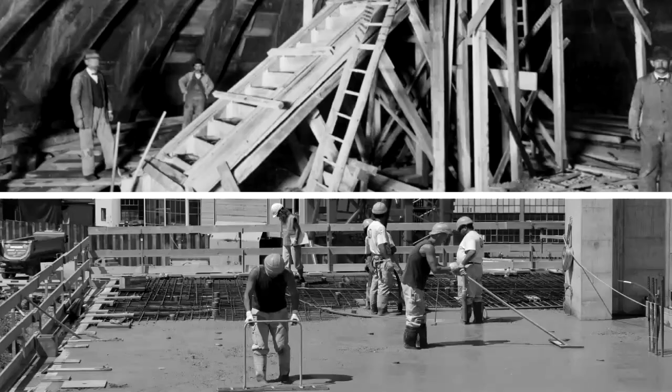I like to start here. Because you're not from Zurich, I might need to explain a little bit what you're looking at. On the top, you see the construction of the dome of ETH Zurich in concrete, and on the bottom, the construction of the only high-rise in Zurich, the Prime Tower. And being slightly cheeky, one could argue that the only thing that has changed in this almost 100 years is that people are wearing helmets.

So this is maybe a good starting point, because clearly the world around us is rapidly evolving. So why does our industry still design for constructions that are being built like this? I want to start there because this is an issue. It's an issue because we have estimations that in the next 30 years there will be at least 2.1 billion more people on this planet. And the way we are constructing in our outdated ways has a lot of impact indeed on our planet.

So what does this mean, providing infrastructure, dwelling, housing for these 2.1 billion more people that need to be on this same planet? Bill and Melinda Gates in their 2019 annual letter calculated this for us. It's basically building the equivalent of one New York City every month for the next 40 years. So just to give you a little bit of a picture of how much construction needs to happen in order to provide for all of these people.

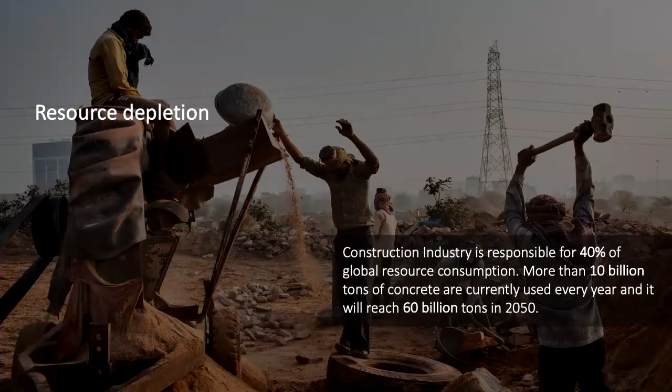On top of that, we are very irresponsibly indeed using natural resources, and the way we construct, we are depleting those. As an example, 80% of the world's urbanization of new building goes up in concrete. And one of the three ingredients of our favorite material to rapidly grow, sand, is estimated to no longer be available in the next 35 to 40 years, at least not in economically feasible ways.

So I hope that with these few statements, that I hope all of you actually are very aware of, you might agree that we need to change the way we design and build our structures indeed. We need many solutions, we need many strategies, we need a change yesterday. But what I will show is in our work, we introduce something that we call strength through geometry and material effectiveness, and I will explain what both terms mean, in order to provide really disruptive solutions. And we do this through state-of-the-art developments and opportunities in computational design and digital fabrication.

The reason I care about this as hybrid architect engineer, as structural designer, as I would call me, is because this is a very typical or an average picture which you see when you want to build a bit higher. So this is the typical weight distribution in a building for at least 10 stories and up. So what we're looking at is that 3/4 of the weight of the building is actually in its structure.

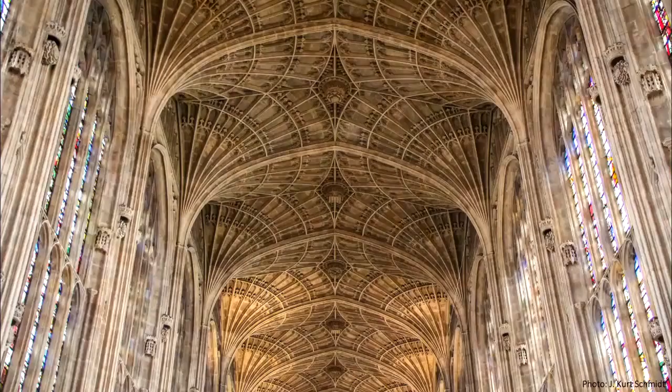First, strength through geometry. I did my PhD at MIT, and indeed in a very different field, as was introduced earlier. I developed a new method to understand and evaluate the stability and the safety of historic structures in unreinforced masonry. I like to start with these beautiful shells at Cambridge University. This is at King's College. This is a chapel of King's College.

You might not know that if you look at these shapes, they span 13 meters with a structural shell, an unreinforced stone shell, large pieces of stone that is only 10 centimeters. And if you calculate the ratio of the thickness over the span, if you were to cut an eggshell in half, that is literally the thickness of these structures.

So, starting my research and looking at these structures, I realized that they're extremely poorly understood, but also that modern designers and engineers would not dare to sign off on a structure like this. And it made me appreciate that perhaps there is something that we have lost in design and engineering indeed. We developed computational tools to actually rediscover these forms, tools that are white box, that actually expose the relation between form and force to the designer.

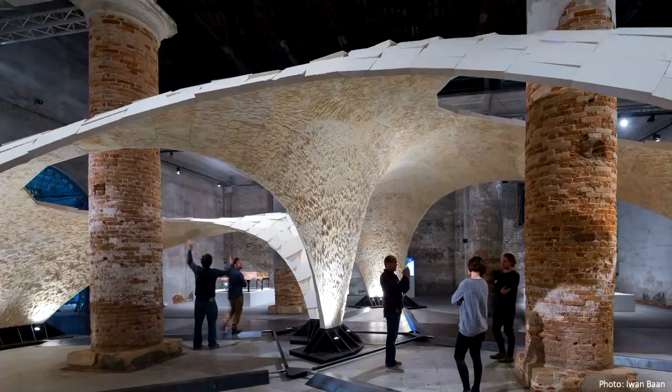But you can do anything you want in computational simulation. And that is why we took the 2016 Venice Biennale as an opportunity to make a statement. At that Biennale, we decided to make a 16-meter span unreinforced cut stone shell. So what you're looking at are 399 cut pieces of stone that are held together just by geometry. What you're looking at is in equilibrium, without even mortar, without glue, without reinforcement.

And so we did this extremely absurd kind of statement, because it is so different than anything else that we do nowadays, to really make sure that our colleagues were shaken up and understood that perhaps there are other ways to design. So here just also showing this thin sheet of stone that is kept in equilibrium. In this case, we are 1/3 of the thickness of an eggshell compared to the span proportionally.

Of course, these kind of projects cannot come together without designing for those. So we developed this entire pipeline to go all the way from a constrained form finding problem all the way to construction. By the way, for this we had only 5 months. 5 months for design, engineering, convincing the Italians that we were not absolutely crazy, fabrication and construction. I must admit that the third step was extremely challenging and they made us work for this process.

This actually was how we started, and this is also how we approached the project. But to be honest, as much as I will advocate that these kind of design challenges cannot be achieved without computation in every step from design, engineering, logistics, all the way to efficient fabrication, I also am a very strong believer that you need to think first, because if you put crap in the computer, then crap might indeed come out.

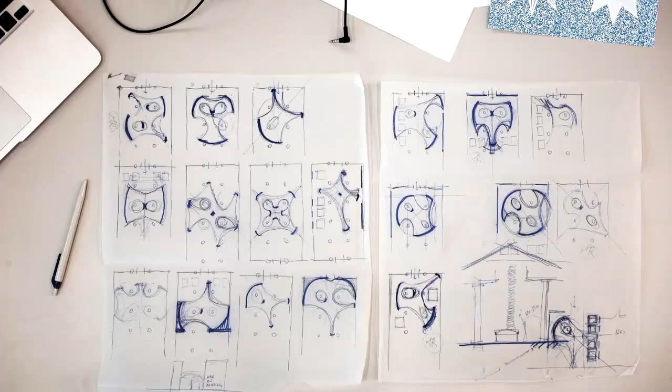And so these are the real sketches that we did in the beginning. These are my own sketches to try to understand the relation between the boundary conditions on the site and the geometries. And then we continue digitally. So this is actually digital sketching.

Because as I mentioned, these tools, which we share for free, this is RhinoVault, and RhinoVault 2 is coming out in less than a month, so an upgraded version for all the RhinoVault fans. No worries, it's coming. And so this allows you really to very explicitly start to sculpt and shape these kind of beautiful equilibrium forms.

This was an interesting moment when we were ready to start fabrication. Our contractor, our stone experts, the Escobedo Group in Austin, Texas, did a calculation, and this would have taken 2.5 years, not 1 month. And so then we realized that indeed we should take advantage of these more advanced cutting techniques, like for example these diamond encrusted wire saws. So it's basically a hot wire cutter for adults, and these multi-axis kind of blade cutters indeed.

So how did we achieve to go from 2.5 years to 1 month in fabrication? Here an overview of the steps. So a key thing is when you do 3D milling, complex kind of operations, never have to change or move the blank. Saves a lot of time. That is what you see on the left. Then we use these very efficient blades that really cut through this limestone like butter to make the interfaces.

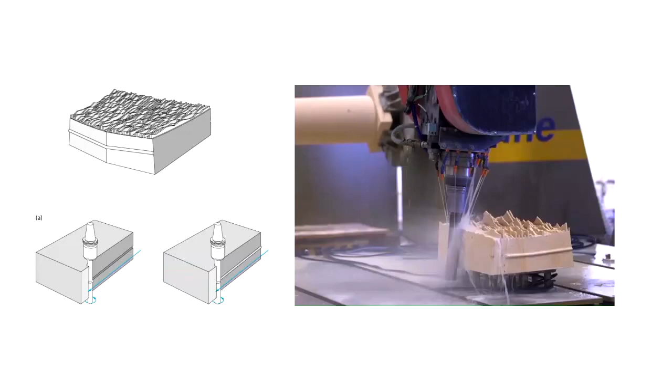And the doubly curved inside was approximated just with a few kind of rough cuts that were then hammered away by Hector. So one guy was in charge to hammer away all these little fins so that they would look a little bit similar. We did have to also custom design some profiling tools, and this opportunity we took to then include these little 6 millimeters reference elements.

The reason that we needed these profiling tools is because every stone had to be within 0.4 millimeters in global tolerances. Otherwise, this 3D puzzle would really not come together. But this actually helped us in engineering as well. So this was mainly a reference. Imagine that we are talking just about 5 centimeters. And so the masons had to place the stones exactly where they needed to be. We didn't have the references anymore. As you see, we had this rough cut for fabrication optimization on the inside.

But as I mentioned, for engineering, this was a key breakthrough moment. Because one thing that we try to also clarify in this process is that you could make a model of this complex geometry, and you could think that this is a perfect world situation. In reality, all these stones will have tolerances, not everything will touch perfectly. So what this mini reference mark gave us is actually, as a structural engineer, we could have the guarantee that stones would not have local sliding. And so that allowed us to really simplify the engineering approach and to focus on very intuitive methods indeed.

So here are some images of this stone vault being brought together. And maybe another thing to highlight is that we wanted to make this piece very educational, and all the cuts on the inside are actually aligned with the global force flow to make the visitor actually understand how this structure works indeed. You also see that it has this unique aesthetic that we of course celebrated, but the aesthetic is entirely driven by these fabrication measures, these optimization methods that we introduced earlier.

So this structure stood very happily for 5.5 months during the Venice Biennale, and is now unfortunately in boxes waiting for its final location, probably somewhere in Austin, Texas.

Obviously, we don't do these kind of crazy things without a lot of prototyping. This was one of our very early prototypes, models that we did in 2010. As you can see, this was quite an exciting day. We don't get to destroy our own structures typically.

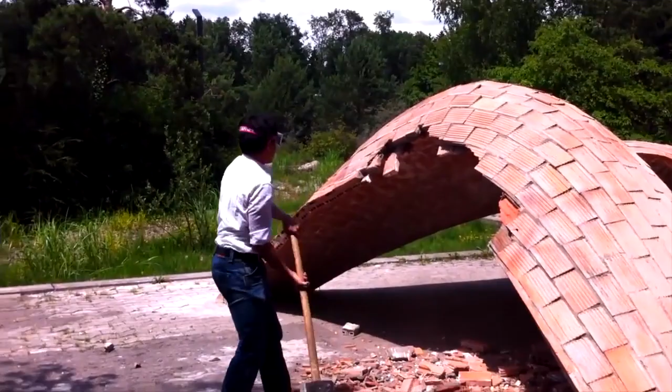A bit of making fun of my PhD students that clearly are not used to handle a hammer is appropriate, I think, but anyway.

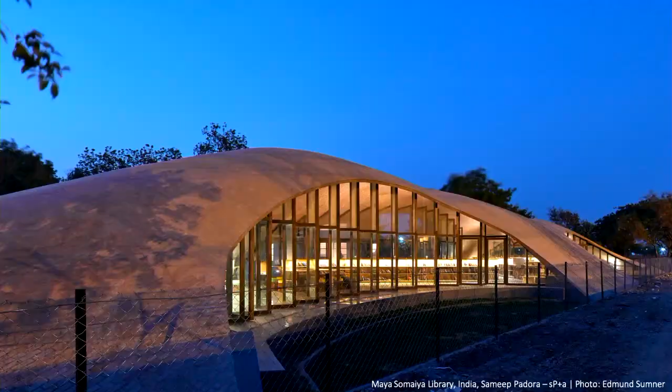So something that you see is the robustness, the resilience of these doubly curved geometries, that even if you take the supports away, they still stand. And so this is maybe an important message that indeed geometry is a key factor in the stability of systems, even entirely unreinforced.

I will now shift gears to quickly show a project that we had nothing to do with. This is a project by Sameep Padora in India, where they developed this exciting roof for a library of a local school with an extremely tight budget. But then suddenly I started to learn about this project, and in fact, in a very interesting way. Suddenly, we got full credit for the design of this project because Sameep and his team kind of argued in the description of the project that the design was thanks to and entirely because of RhinoVault.

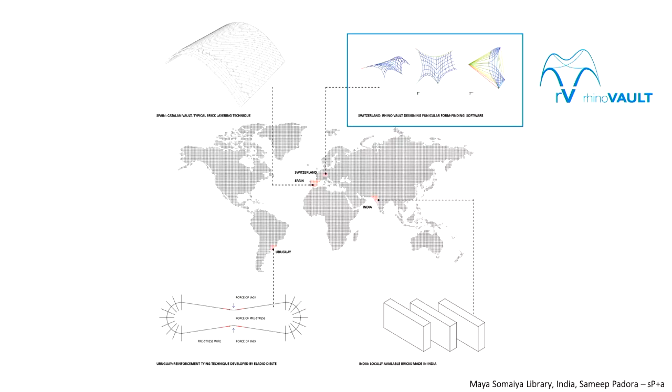And I just wanted to show this as a quick anecdote because many people have questioned us why we share everything we do, why we open source all our methods, why we develop tools for others to discover structural form and so on. And I think this is actually a nice message that 8 years after we did this sharing, we got credit for the design of probably the most beautiful project that was ever done with RhinoVault. There's many beautiful anecdotes about this project indeed.

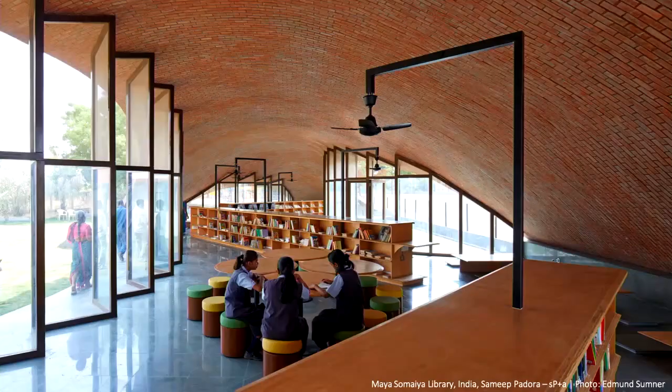All right, so strength through geometry was the first message. And there I wanted to say that you can do exceptional things with humble materials, unreinforced, by actually getting the geometry right. What about this material effectiveness? So maybe it sounds peculiar. I'm not talking about material efficiency. And so I want to, through some examples, clarify what that means.

I'm talking about using a material in the way that it wants to be used and not necessarily the drive and the search for lighter and lighter. So basically a light structure could be more polluting than a heavy structure if you use high-polluting, high-tech materials. Also there, I will look to the past to discover and show some examples how this works.

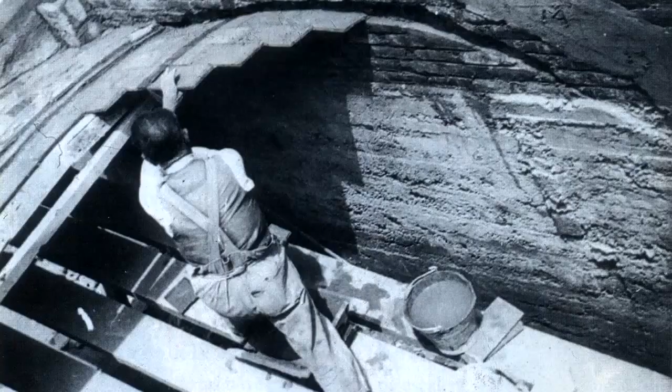So here, for example, maybe you recognize these beautiful tile vaults in the Oyster Bar. This is in Grand Central Terminal in New York City. And they were built with a traditional Mediterranean technique that allows to build these shells without any centering. So here you see these tiles being placed. So you have some boundary conditions, and then with a fast-setting mortar you can build this.

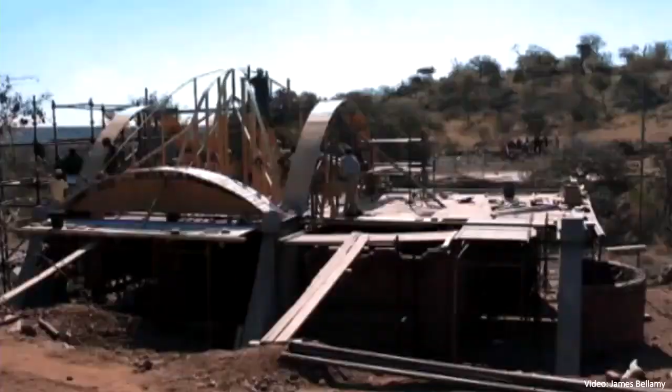I'm going back all the way to 2008, or this construction was in 2007, of a project that I was lucky to do the engineering for during my PhD, a project by Peter Rich Architects and John Ochsendorf. It's the Mapungubwe Interpretive Center in the middle of nowhere at the border with Zimbabwe in South Africa. There we translated this traditional technique where you first build these boundary conditions on formwork, and then the white mortar is this fast-setting mortar that allows to build without any support.

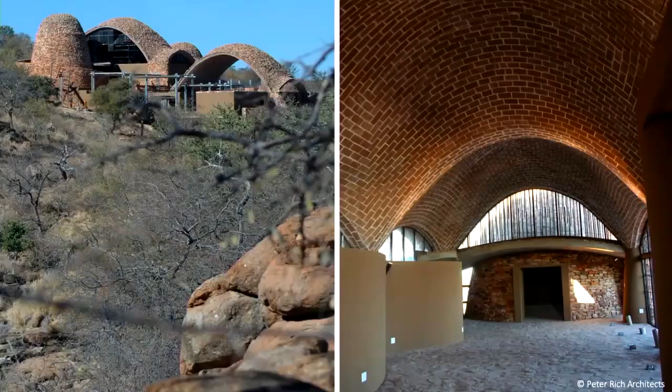So all the timber that you see is actually guide work to guide the unskilled laborers. These were a week earlier still farmers and carpenters that were introduced into this new technique. These kind of transfer projects are extremely exciting because you also see the excitement of the local laborers that are doing these unique new techniques by themselves, and the project nicely blends in with main spans of 18 meters.

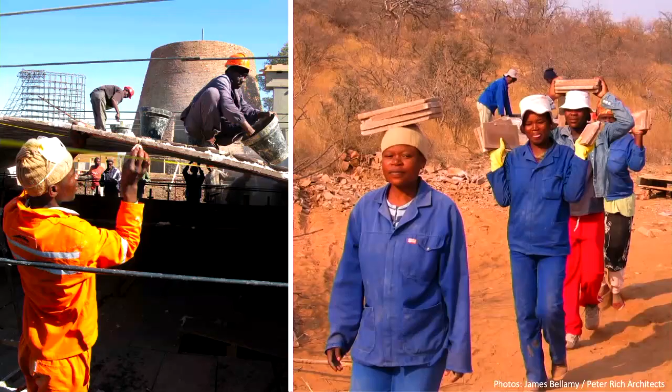But why am I talking about this project? Because this was actually one of the most eye-opening moments in my career, and I want to contrast these two images. You see these happy ladies working on the right, and you see that they're bringing these tiles on site in little packages of 3 or 4. This is because this is a picture of week 2. What am I talking about?

The tiles are designed to only take 2 megapascals in compression, so that is basically peanuts in compression, 10 to 15 times less than a regular standard concrete used every single day. But if you take one of those tiles that are about 25 centimeters, you can just break them in your hands. So they're not designed to take any bending. And first week indeed was an entire disaster because the men couldn't be bothered, and more than half of the tiles arrived broken on site.

And so why I tell you this anecdote that I learned from the Kiwi master builder, in fact, James Bellamy, is that these weak materials, if you place them where the forces want to go in compression, this becomes a safe structural geometry that is still standing there after many years now in active operation. It is a museum for African art. All right, so how does that work?

If you don't activate double curvature or good geometry like what we did in the Armadillo Vault, an arch is very good and very efficient to take a certain loading case, for example, the self-weight. But if you have a large point load, like people standing on one side of the vault, the red line represents the resultant of the compressive forces in your system, and if they exit the section, this basically would mean that that arch would collapse.

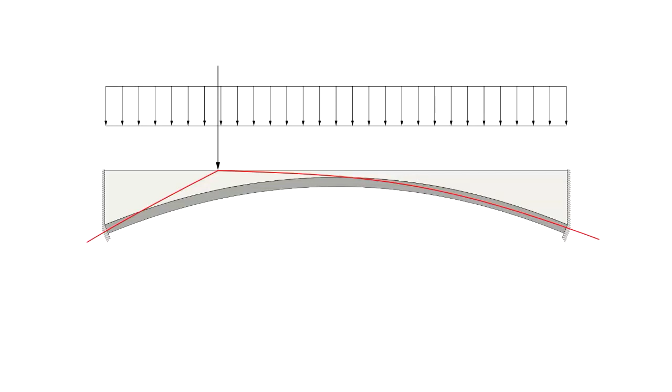So another strategy than activating double curvature is actually to locally stiffen those arches by increasing the structural depth, by providing load paths for these compressive lines. And then if you add a tension tie, then rather than thrusting on the neighbors, you actually resolve the forces, so that you can basically place it simply on a wall. And indeed, placing simply on a wall, what we have just done in these 10 seconds together, we have developed together a 70% lighter equivalent of a floor plate.

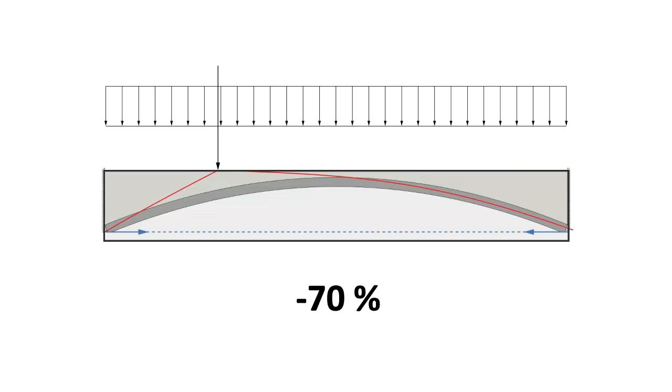So basically, by reintroducing these principles in historic houses, you see these arched basements everywhere. Just by reintroducing that, you save more than 70% of material. So this is something that really clicked with me, and where I understood that it's not just about activating weak materials, but these are really disruptive benefits that make sense in many contexts indeed. So these are these beautiful tile vaulted floors. You see also the tension ties. It's not just the curved geometry. You need to resolve the forces.

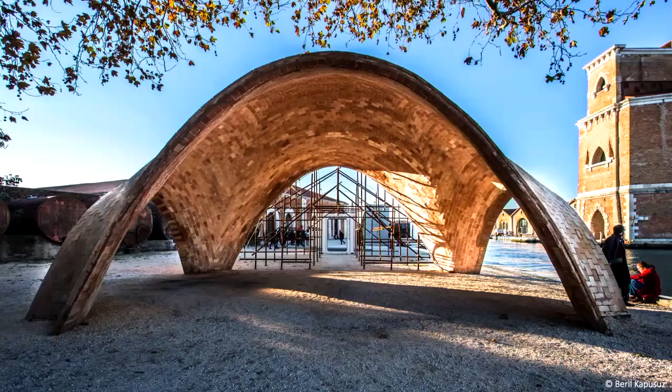Maybe another project to kind of go on this idea that even recycled, very bad materials could become structural. So inspired by our little buddy Wall-E that indeed compacted waste to start building his cathedrals and skyscrapers of waste, my colleague Dirk Hebel found indeed a beautifully recycled material, here Tetra Pak. But this material has absolutely no structural properties.

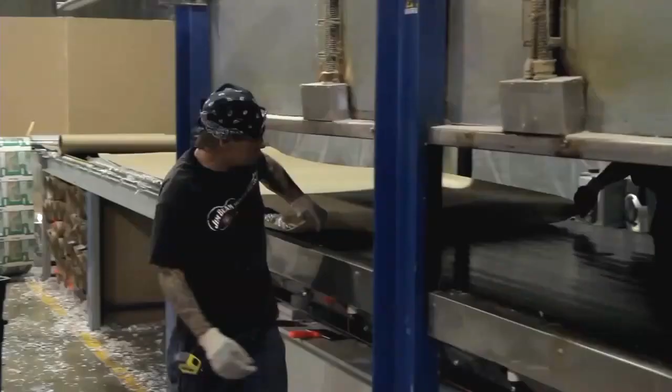1/10 of the compressive strength of timber, which is not that spectacular, that's still okay. But 1/100 of its elasticity modulus, so it's basically a very flimsy material that is not meant to be structural indeed. That sounded like music in my ears, a perfect material to demonstrate again that actually if you get the geometry right, you can provide a very safe structure. So this is the process of this material that is a kind of a replacement material for sheet rock, or something.

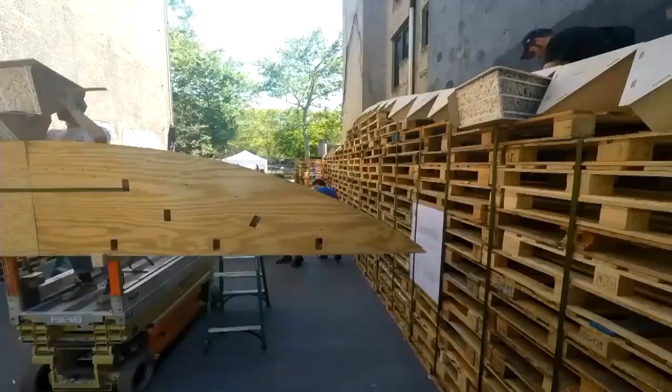And here also we use the logics of unreinforced masonry to be able to assemble this very simply without needing any glue, any nails, any connectors except for these plastic wrapping sheets, and we could do this with the cheapest labor available, which obviously are students.

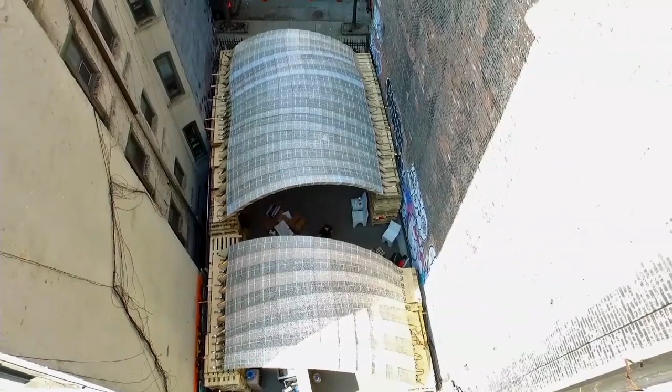Why it was important to keep it unreinforced is because an important part of the message was actually to recycle these elements again and put them back into the recycling loop, into the circular kind of logic of these materials. Obviously you see that this arch appeared, but we had a little bit of fun here. The orange are orange juice, the blue are milk cartons, and then we had wine cartons on the other side.

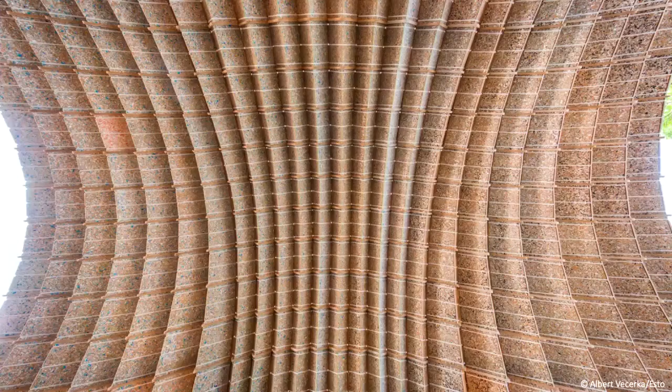And so this structure happily stood for only 3 days. That's why we didn't want to leave any waste behind. And indeed, every single piece got re-shredded and put back into the factory. And so for 3 days, we generated this little cathedral of waste in New York City.

I was getting a bit annoyed that everyone called me the arch guy. So I decided to show that structural geometry can also work in different shapes. And we did this with an even more stupid material, mycelium. So I talked about 2 megapascals in compression. This material takes 0.2 megapascals in compression, so 10 times less than peanuts.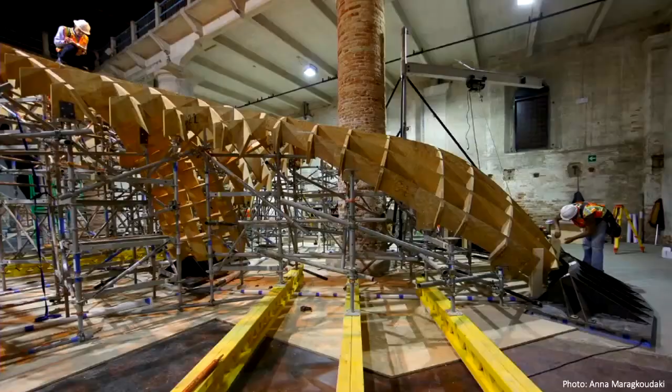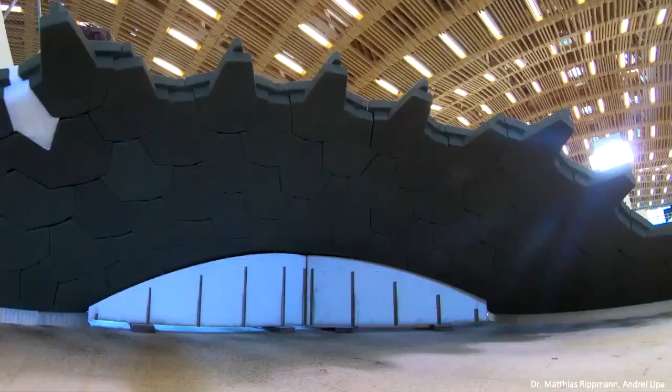This is quite spectacular. But what I didn't show you very clearly is that the Armadillo Vault was built on this extremely extensive, expensive, and wasteful formwork. So can we actually develop systems where we can start to assemble these kinds of shapes without the need of any formworks? So here we developed this kind of new voussoir stereotomy with interlocking parts that work with stable sections that basically allow anyone in no time to assemble these kinds of beautiful geometries.

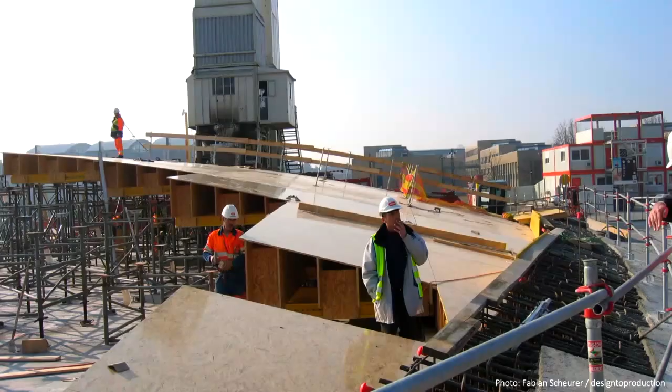This is very specific and probably far off from real construction, and that is why we wanted to see, can we provide such beautiful surface structures in concrete? And can we do this efficiently? And indeed, you see these structures only for unique projects, like the Rolex Center in Lausanne, because they need a unique budget, which goes to this full foundation to build up all this scaffolding, and then you assemble this formwork that typically takes months or even years to fabricate, and then unfortunately it almost always turns into this after 28 days when the concrete hardens.

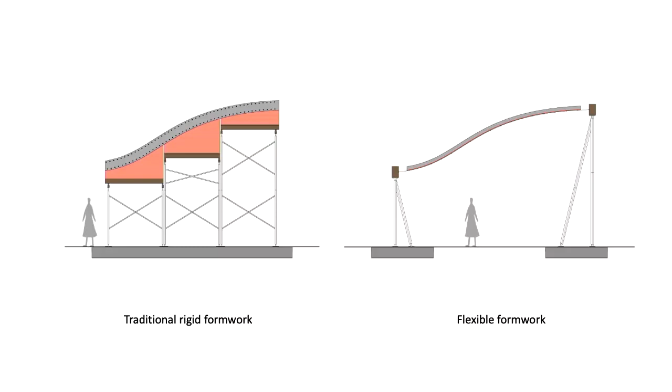So can we provide a lightweight system? So here, for example, fabric with a cable net. To summarize, what we're after is basically, can we replace the rigid formwork with this flexible formwork. And there are two important messages on this slide: why we have all these inefficiencies is because of this word rigid, this is really brute force. Can we hold the geometry exactly where it needs to be? If we develop a flexible formwork, this is possible, but then we need to design for the deformations that we will have to expect in such formworks.

So what I'm trying to say is, can we use something like this to realize a concrete shell like this one? So this is a prototype that we finished in 2017, and it will be built on top of this building where we already have the DFAB House, and on the other corner there will be this unit that is called HiLo. Might look something like this. It is a very engaged project that is now 8 years in development, but we are now on site, and this is really a project that challenges the relation between innovation, research and industry.

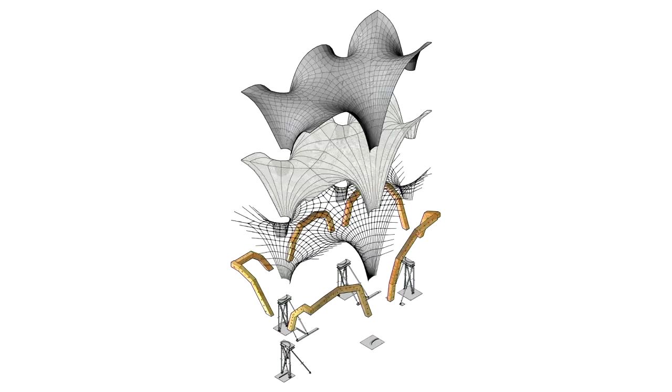The roof was quite a statement, and indeed our client, EMPA, got a little bit nervous and at a certain point said you need to demonstrate in a one-to-one prototype that you can do what you promise. And so we started this. We did this with all the partners that would be involved, developed this kit of parts, and assembled a team of just 3 people to assemble the entire formwork in 1 week's time.

Here I want to re-emphasize the alternative would be basically months and months of milling of all this material that would be wasted. So this 1 week of Meccano or Lego putting together a formwork is not that bad.

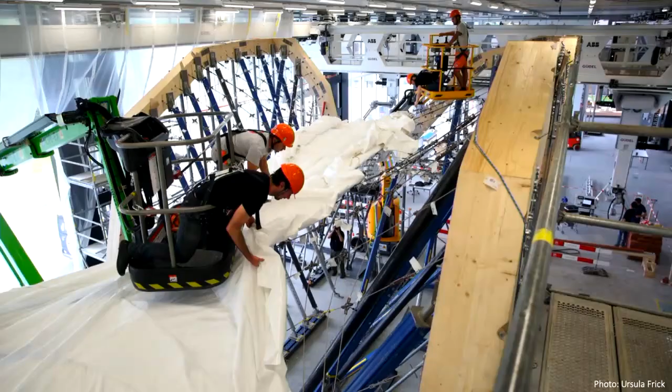Perhaps this money shot really clarifies what we're after: with a very lightweight, by the way, 100% reusable, reconfigurable system, we realize basically the forming of this efficient shell. So here with the fabric being applied.

But then, and I hinted at this in the Armadillo Vault, you can be 100% certain that your geometry will not be there where it needs to be. Even though we have developed these beautiful optimization strategies that tell you exactly how to pre-stress all these different cables so that we have a non-uniform pre-camber. That means that our formwork is a little bit higher than where it needs to be, so that under the weight of the concrete it hits exactly the geometry.

So we have these algorithms. We can even include hard constraints like facade lines. All of this is nice, sophisticated research. We got a paper prize for this, it was mentioned, the Tsuboi Award. But this has absolutely, unfortunately, nothing to do with reality.

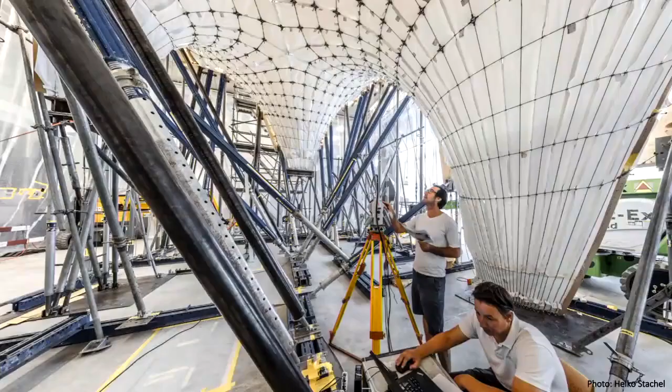Because every single connection can be a little bit off. Even in Switzerland, you can be 100% certain that the boundary conditions might be off by a millimeter, or to be honest, by multiple centimeters. So this is the reality of the building site. And that means that your formwork is not at all where it needs to be. That's why we included this little axis, and we developed with our partners in scanning a system to know where your geometry is.

Unfortunately, that is not the end of the story, because then you could say, okay, you told me that 100% certain the geometry will not be where it needs to be. Let's then just retighten it and put it where it needs to be. Unfortunately, if you have turnbuckles at all ends of these cables, you have about 90 trillion options. And which is the one combination of tightening and loosening that redirects it where it needs to be?

This is the excitement in the NCCR Digital Fabrication. That is typically where this research project would stop. You would write a paper, you would say it was a good idea, but has nothing to do with reality, so too bad. But actually there's people that specialize in this. In automatic control, these are basically mathematicians that know exactly what to do with your problem, because you have an equilibrium model, you have unpredictable parameters, and then you need to make a decision.

Typically, they apply their research to autopilot for airplanes, for example, the same idea. You have an equilibrium model, you need to make a split-second solution. Which of all the control systems will actually keep your airplane in the air? So in a way, this is a little bit of an easier or less risky kind of business indeed.

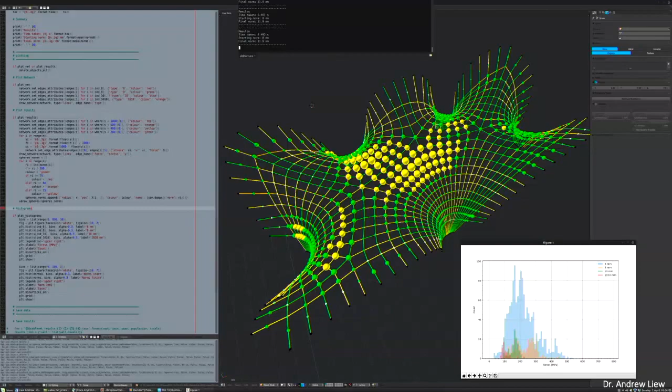This is a special moment for me because I'm presenting this now as a beautiful success project from A to Z, but believe me, we had to fight a lot of skepticism. It took us 1.5 years to even find a contractor that wanted to take the risk to be involved with us, that we had to pay at cost, so no sponsoring whatsoever. So that was challenge number 1.

Then we finally found someone brave, and during the entire process, we got a lot of comments. Everyone on site was like, oh my God, these 2 youngsters there, they are making us do something that will never work. This will cost 10 times more than it needs to. Until actually this point, because here they realized that this very funky geometry, we reduced it to a very simple patch of 40 by 40 centimeters.

And that was possible because this node that we developed became that logistical device. It basically is where all the information is brought on site. So you have the space holders for your reinforcement, you have the references for how thick the shell locally needs to be. It also becomes the connection for your shear connectors. That is also the same axis where we attach the waterproofing membranes and so on.

So basically, here our partners realized, that is what they meant. That is why we did all this pre-design, this digital fabrication, and this is basically what made this project very realistic indeed. This is a project where we used carbon fiber reinforcement. That is because something that I didn't say is this 10 by 20 meter concrete shell is only 3 centimeters in thickness. And so that demanded, of course, reinforcement that would not corrode.

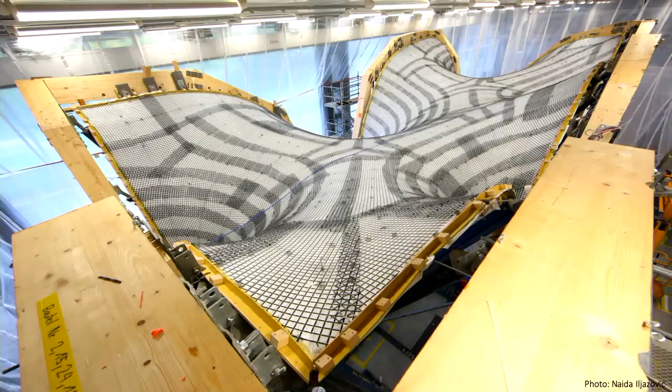Also, can you imagine having to pre-bend all these reinforcements? If you're aware of the project Stuttgart 21, this would be another Stuttgart 21 disaster in the making indeed.

Then the concreting was done. So here you see how this is applied and then vibrated in place. I have to admit that there was a little bit of concrete chemistry and magic happening. But that is why we have to work together with material experts to make things like this possible. So there it was standing.

As you can see, this is not Swiss standard architectural concrete. This is not fair face concrete, but because we did every single step with industry, and about anything that could go wrong went wrong in this project, it was actually our industry partner that signed off to the client and guaranteed that the next one would be fair face concrete, something that I would not have dared to make as a statement.

I also want to provoke a little bit with this quote from our engineer of record. She called our approach building information modeling on steroids. And that is because we used our open source computational framework COMPAS to extend the building information modeling approach, but more importantly to centralize all the information in this very lightweight computational model through COMPAS.

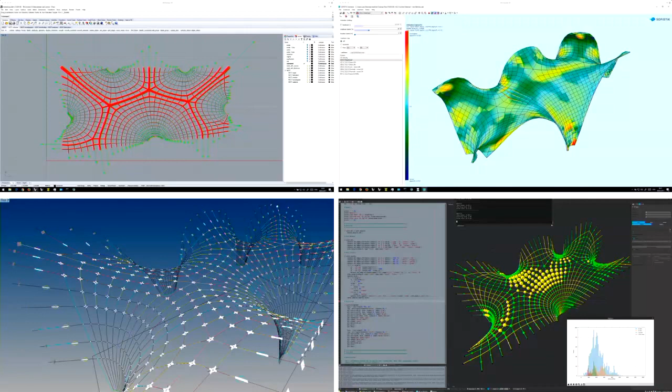So this is now finally getting built. We are on site. There is a new challenge that we are now on top of the building. The 3 centimeters is true, but we have 2 layers of 3 centimeters. It is a novel concrete sandwich shell. And because this is a real project, we also have real constraints, like we cannot have thermal issues. So we have the thermal breaks, which is the detail that we developed here in the middle.

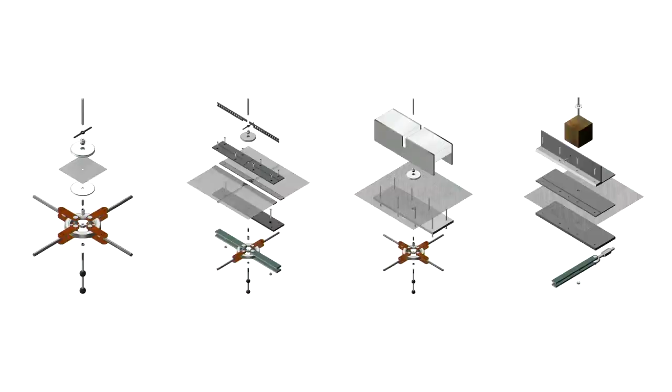The second one on the left sounds maybe very specific, but this was a breakthrough innovation. This is a specific detail that allows us to have, both structurally and aesthetically, a cold joint. And that means that this gigantic shell, this large surface of concrete, can be cast in very manageable stages. That was something that we learned the hard way, that you also need to have these fallback options so that not everything needs to happen in one go. And we can basically control the system on site.

So here you see, for example, the profile at the glass facade. We want the glass to disappear into the concrete shell and to have visible concrete from the inside all the way to the outside. This image was a prototype to demonstrate the quality and the finish that we have, and we needed to guarantee to our client that we would deliver this concrete work within 5 millimeters of precision, which, if any of you know about concrete construction, typically it's a couple of centimeters, so 5 millimeters is absolutely absurd.

But the reason we now found out that this was required from our system is because they didn't want to give any of the other contractors an excuse for why they didn't deliver, because it's easy to point at the new guy and the new innovation. But we are looking forward to this beautiful aesthetics, this imprint of the fabric, a new kind of experience for architectural fair-face concrete.

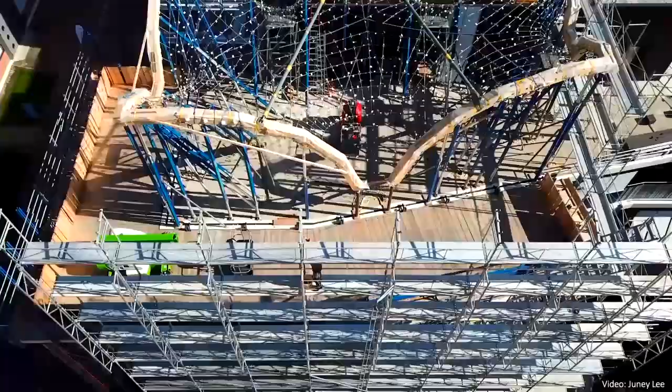This was the building site just before the winter break. You see that it's extremely clean, not only because it's in Switzerland, but also because this simple kit of parts can be assembled by just 2 workers, together with my research team, who are now expert complex formwork installers next to doing their PhD research. So this is Sandy finishing a few details.

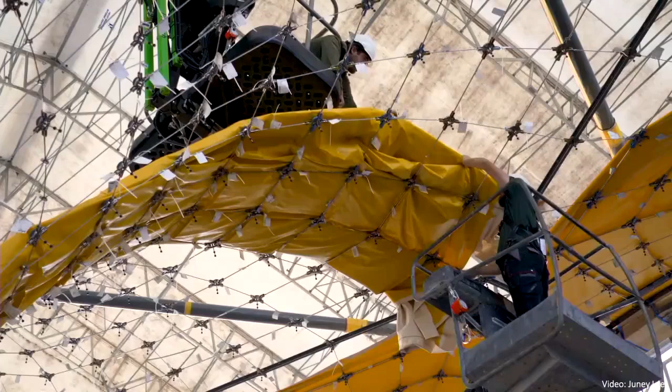So everything is prefabricated, and this thing came together much faster than what was budgeted by the project team indeed. And so here you see maybe the finishing, the detail that I talked about, the black spine in the middle, is basically this detail to create this kind of joints.

So why I labeled this under computational design is because I hope you understand that this pre-calculation, all these algorithms that allow such a lightweight, entirely reusable kind of kit of parts to be effectively used in a real project, that cannot happen just by a typical sequential process. Everything needs to be understood.

I was entirely blown away when the contractor, Marti, which is a very traditional, highly respected concrete contractor in Switzerland, called me 2 weeks after the prototype to ask if we were okay that they would do a bid for a project based on this formwork system. So in a way, we seem to have convinced our local partners that this makes sense.

Let's now see what we can achieve if we really also start to innovate in digital fabrication. And more specifically, we wanted to challenge ourselves. Can we do even better than the system that I just talked about? Can we go on site with something that is so lightweight that it can literally come into a backpack? And that is where we started to do research in 3D knitting of technical textiles. And this is maybe a first hint.

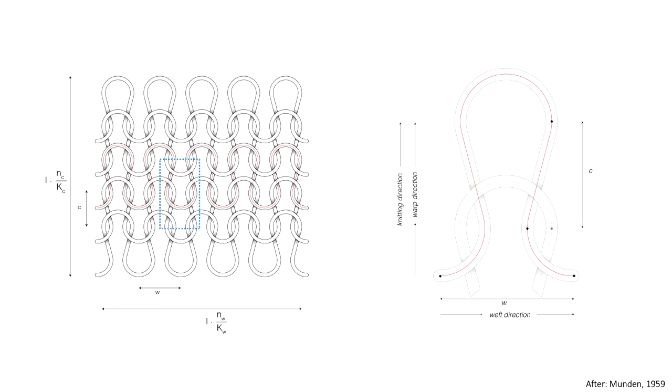So in order to really fully control this system, we dove in all the way to the yarn definition and the loops and the jumps, and also activated the 2 beds in a typical flatbed knitting machine. And so the idea was, can we actually steer this machine to make these non-standard kind of geometries? The reason that we don't need cutting patterns is because the red lines that you see in there are called short rows. They're basically increases of materials locally that allow you to actually drape a non-developable surface.

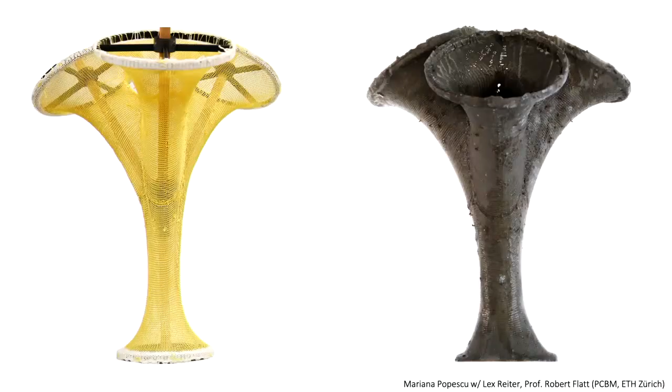But it was very exciting when Mariana and Lex started to actually talk to each other. So Lex is our concrete magician, and they basically thought, what happens if we were to dump this knit into a fast-setting cement paste? And indeed, what does happen is you can then suddenly have these non-standard complex nodes that are super lightweight, and that basically could be brought on site as a very efficient stay-in-place formwork.

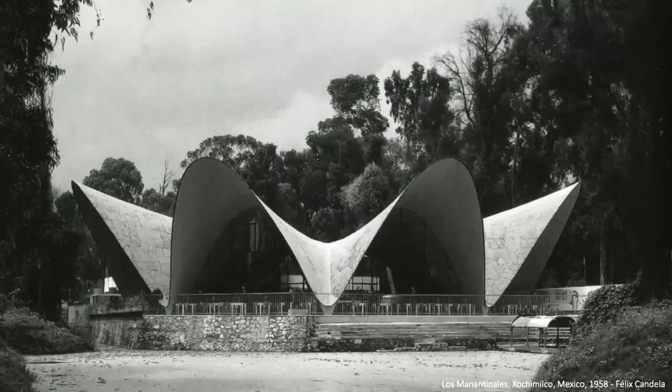But of course, we wanted to challenge ourselves a bit more, and we teamed up with Zaha Hadid Architects to demonstrate this at a quite sizable scale. We called our pavilion KnitCandela. It was in Mexico City. And indeed, like Candela, we wanted to have a very expressive, thin structural shell.

But Candela, as you maybe know, was able to realize his shells because he always used these hypar geometries which allow to use these reusable straight line formworks. But what you also probably notice is that these formworks still use a lot of material, are very labor intensive, very complex indeed. And on top of that, the hypar is not a bad structural form, but you can do much better. So can we be more flexible with respect to the shapes? And that is when this pavilion was designed indeed.

So this is a quick movie of the process. The initial design sketch was done by Zaha Hadid Architects. They also generated the pattern on the inside, but then all of this was done by my group, basically made it feasible, made it buildable. And for this, again, we used a cable falsework, so basically that carries the concrete.

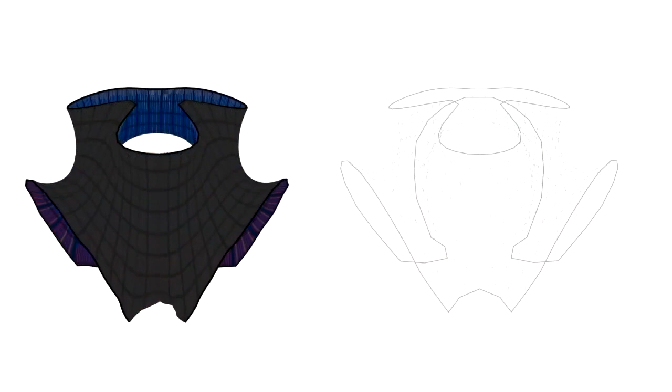And then in this case, the shuttering was this automatically produced knit that could be brought on site in a very efficient way. But again, the knit serves as that logistical device that basically takes all the challenge of local erection into account. What you also saw is that this was a nice demonstration of compas. We did hundreds of iterations, and because the FE model was directly connected to the CAD geometry, we could do all of this very efficiently.

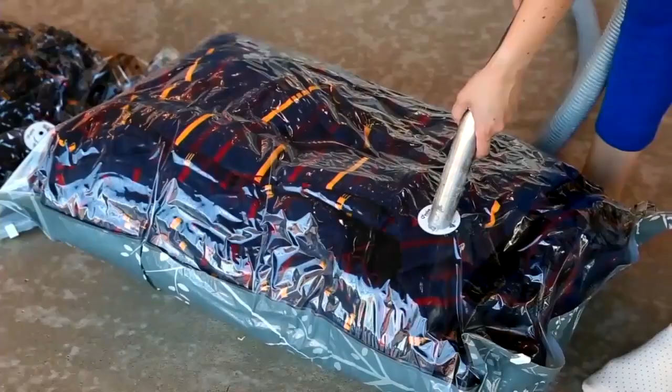So here you see Mariana and Lex just the day before they had to take their plane to Mexico City, wrap up the entire formwork that weighed only 25 kilograms and could be brought in 2 regular pieces of checked luggage indeed. So this is the scaffolding that was done by our local contractors or collaborators, and then we could basically, as you see here,

the cables are nicely referenced by all the little channels that are elegantly included in this knit. That is something that you could not do with a woven fabric. You would need to do quite a lot of stitching, and this immediately becomes not realistic as a strategy. So here you see the tightening, very simple tightening, and then here the knit. Unbelievable that this 3-dimensional scarf or sock nicely fit. Some additional features to beautifully finish the shell.

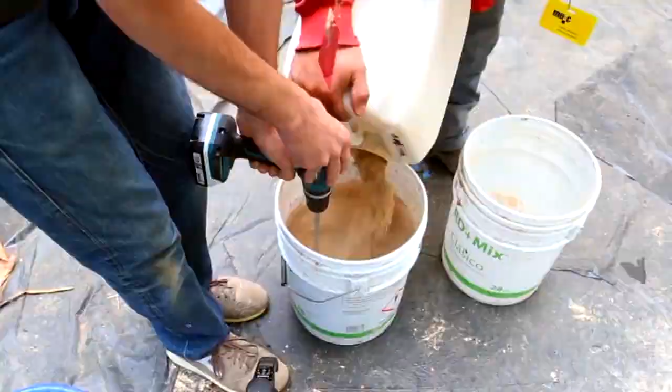And then these modeling balloons, so these clown balloons, were used to inflate some pockets to basically create a nice, stable and stiff geometry. So what you see here is this specific hardening cement paste developed by our colleagues in the NCCR to make this knit stiff enough to be used as actually a stable formwork indeed. And for me, what's exciting is that we had never talked or worked or seen any of these workers, and basically we just provided this formwork, and the local craftspeople could then very cleanly finish this shell in record time indeed.

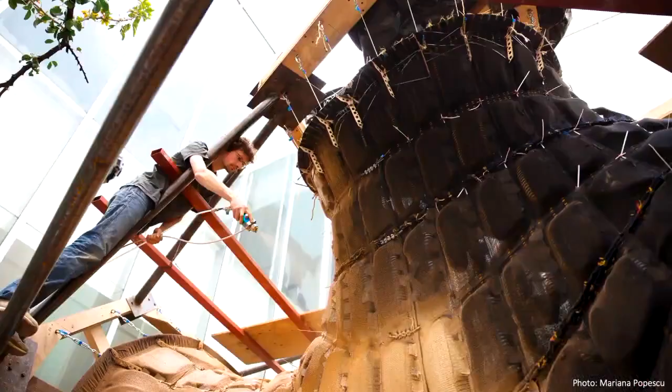Because I think I'm running out of time, I might skip through these images to maybe make a few more comments. So here you see really how transparent and lightweight this thing is. So we're talking about, well, I will come back to this. And then here you see the balloons being inserted. You also see that this is maybe not done in Switzerland because we would not be able to hang over a structure like this. But the key message is that this indeed beautifully looks like a Swiss chocolate, an indication that this must be a good idea.

But what you're looking at specifically is that these inflated balloons allowed us to make these pockets. And this was necessary because we had a fiber reinforced shell, and we could not just increase the thickness because we had a weight limitation on the ground. And so what we wanted to demonstrate is what you can achieve with this knit and with nothing else. So here we achieved with this kind of formwork a structure that had stiffening ribs in 2 directions, something that would absolutely not make sense to do with a typical milled formwork, because that would be so much waste, so much cost, so much time to install this.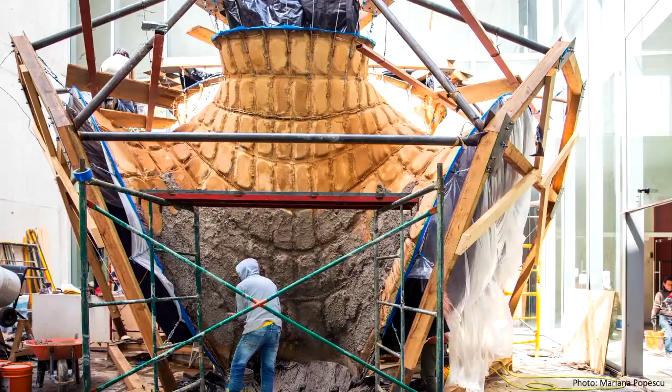And so here you see that we literally provided a more interesting canvas to our local colleagues that could then finish this beautiful concrete work. We took advantage also of another form of the knit. Let's expose the knit and actually provide a more tactile, a different kind of expression of a harsh concrete shell that was beautifully soft and had this other kind of experience on the inside.

Why I present this project proudly, not only do we think that it has some aesthetic merits, but let me throw some numbers at you. What you're looking at is 50 square meters of concrete surface. The concrete shell weighs 5 tons, and the knit weighed only 25 kilograms. The entire formwork, so not the reusable external scaffolding, but the internal formwork, so the cable net, the connectors, the knit, altogether only cost 2,500 euros. So what would that be? Less than 4,000 Australian dollars, I guess.

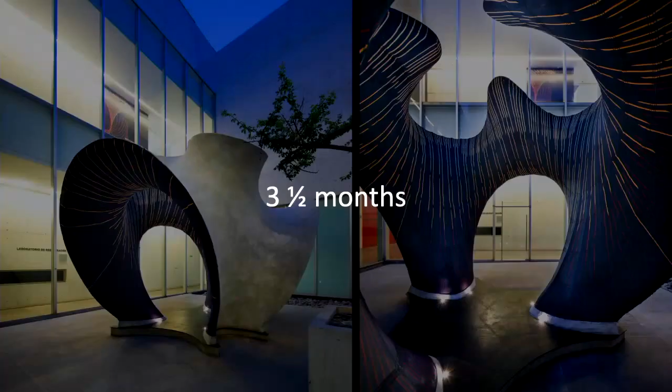But a killer argument is perhaps this, that the knit took only 36 hours to be produced. And if you were to generate the same surface as a milled surface, this would have taken 750 hours, which actually translates to 1 month of non-stop milling. And then the time of design, engineering, prototyping, development, installation and construction, from the first email by Zaha, the invitation, all the way to the opening exhibition took only 3.5 months.

This is also an important message that with this integrated design, engineering, fabrication, construction process, we can significantly increase productivity and delivery on site, but we can also change the proportions between design and development versus construction. So we really pushed everything, all the development, until we went on site.

And perhaps an exciting outlook is that these machines that are used to make garment t-shirts are available all over the world, and what is cheaper and lighter than sending 25 kilograms to site is just to send data to your local knitting shop and to make your formworks locally indeed.

Because this is such a special event, I wanted to also show something that I have not shown to anyone, because this is entirely confidential. This is a project that will be featured in MAXXI, in the museum designed by Zaha Hadid Architects in Rome. It will open in December 2020, this year. Although with all this corona business, we might not know if this will indeed happen still this year.

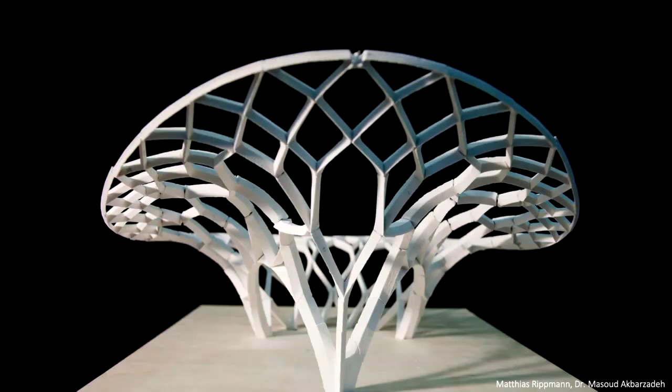But for this project, we wanted to bring back an old project that was done by one of our dear collaborators, Matthias Rippmann, a senior scientist in my team that unfortunately passed away this summer. And we wanted to bring back one of his most beautiful designs, and this is what you're looking at. He called it a funicular funnel shell.

It's a pure compressive vault, but then rather than coming down like these typical hobbit houses or Gaudi-like kind of curves, we wanted to actually open up the boundary condition. And so this is a purely balanced shape that is in pure compression and has one tension tie balancing it in equilibrium indeed. So this also can be done with RhinoVAULT. And to clarify that these principles work, this is a very delicate 3D printed model that took a lot of effort to assemble.

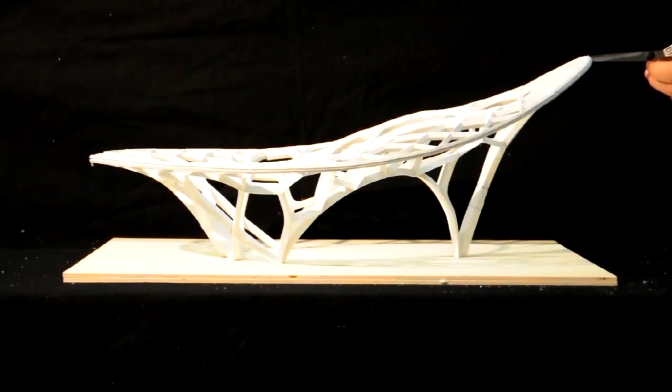This is just to show this is an extreme model, but what is also an important message here is something that in the architectural realm is often forgotten, is that form finding a good shape for your structure is really not the end of the travel. You still need to engineer it, and here for live load cases, as beautifully demonstrated, we might need to reinforce this structure. And that is the big innovation that we want to show in this project, and by the way, that's why it's KnitNervi. It's reinterpreting these concrete grid-like structures.

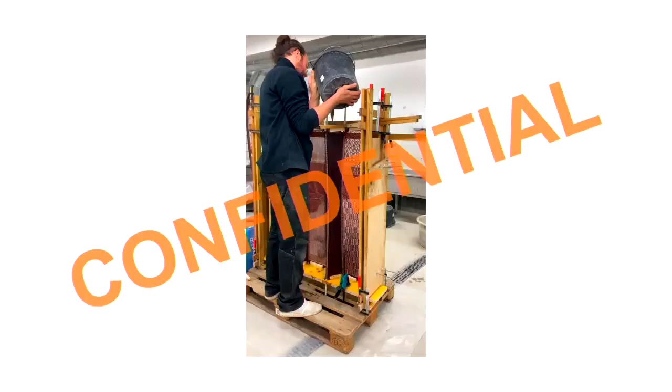And so we will make a concrete grid shell. So basically these very precise, crisp profiles. But on top of that, the forming system will not be an externalized tensioning frame, but will be the integrated reinforcement. So this is extremely close to making a frame of a building. Of course, we do this in an exciting shape. But again, what I want to say is that here we are going one step further, one step closer to reality.

And so basically we will have these beautiful prismatic kind of tubes that can be poured in one go and where, on top of that, exactly where the reinforcement needs to be, it's integrated. Because it's not just about shaping the geometry, anyone that does research in 3D printing knows what the bottleneck is: how to reinforce these kinds of new digitally fabricated structures. So we want to avoid this mess as well. Can this also be integrated in this lightweight package that we bring on site? And so yes, it can, and you will see it all hopefully in December 2020.

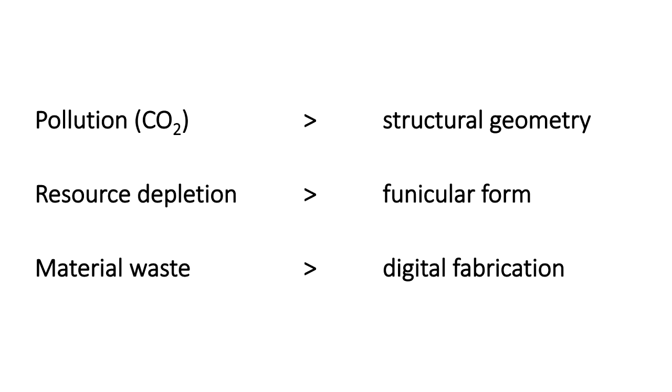All right, so I talked about these three aspects, but now the final project, the final piece that I wanted to show, is where we bring all of this together to address this. What you're looking at are floors. We need a lot of floors in the world, and indeed, I didn't say something earlier. We talked about 3/4 of the weight of a building to be considered is in its structure. What I didn't say is that more than half of this weight is actually in the floors. So you waste most material, and hence you pollute most, by spanning space.

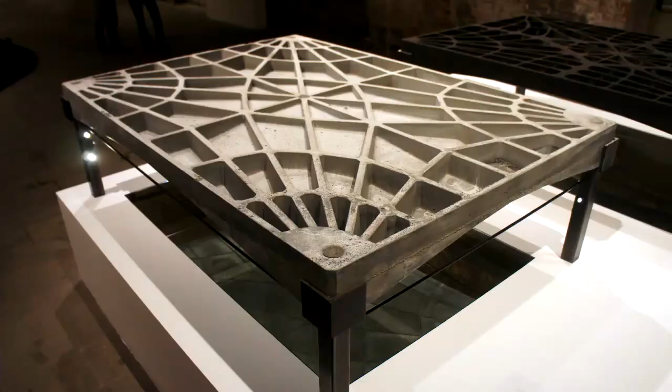And we already talked about this aspect. By reintroducing these structural principles of the tied arch, you can for free realize 70% of weight saving. So we thought in the same project in HiLo, can we already do this in our context? And so we designed this floor plate that only has 2 centimeters of unreinforced concrete. So this is basically a 3D version of the tied arch with an externalized tension tie indeed. We had already shown this at the Venice Biennale as well in 2016.

If you thought that the Armadillo Vault was the point, no, that was just us shouting to get attention so that people would pay attention to the real message, which is these highly efficient floor systems. And then this is a nice demonstrator, again done by Matthias.

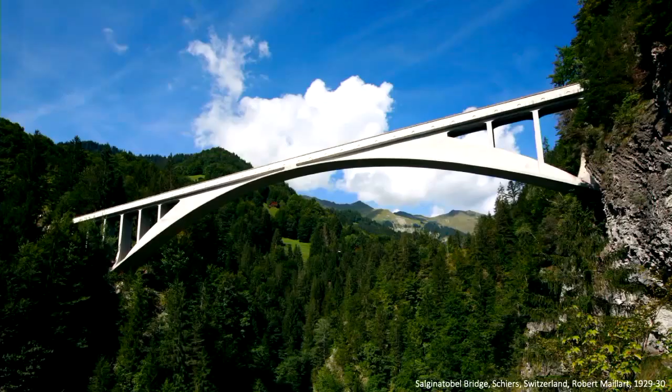This is a fully 3D printed floor plate, where we actually also have these discrete parts. And what's important here is that it's not just about the structural geometry. Here again, we learn from the past. For example, master builder Robert Maillart in Switzerland, who designed these 3-hinged arch bridges because these were the early days in 1929 of reinforced concrete. People didn't understand that material really well.

And basically the specific geometry that you see was very carefully designed with the same tools that we now extend in 3D with RhinoVault, with graphic statics. For any loading case, he basically traced the pure compression shape that went through the 3 hinges. So he made a statically determinate system that allowed basically to understand the equilibrium under any loading case. And what he wanted to guarantee is that the compressive lines stay always within the section, so that he would not get any surprise with this new material that was poorly understood.

So we need to do the same thing, because the 3D printed material that we use, so we use the voxeljet, like a large-scale sand printer, and the material properties are equivalent to what we used in Ethiopia. Peanuts in compression, and if you take a piece out, you can just break it in bending again. So this is very scary. To make our point, we did a full SIA requested loading protocol. So this is an experimental campaign until failure to demonstrate that it can take all loading cases required.

If this looks too engineering or abstract to you, perhaps this makes more sense. This is almost 1,200 kilograms of ETH nerds standing on a 2-centimeter floor plate with material properties equivalent to cold dark chocolate. So this is an important message, and why I want to put this image here is because we still get quite a lot of resistance from practice that this is possible.

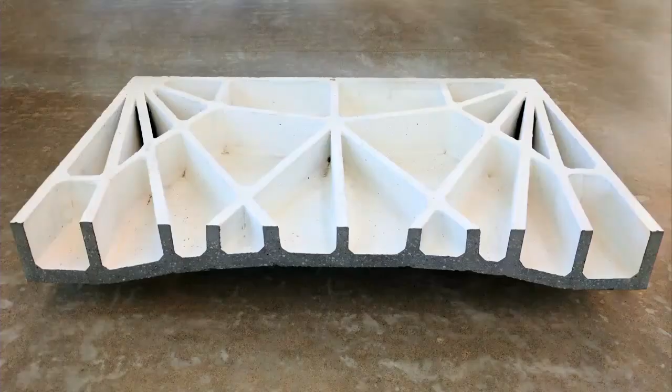And these cavities can also be activated for more optimized building system integration so that you are not just layering, like Rem Koolhaas was clarifying in his Biennale, that this is a key challenge of our construction indeed. So you're not only lighter, you're not only using weaker materials, so practically no pollution, but you can also offer at least 25% more real estate because you make your floor depth lower.

Don't have time to talk about the details, but Tomás Méndez, former postdoc, actually demonstrated that these structural geometries are extremely acoustically performant, and there as well, architecture seems to always go for the brute force way, and indeed brute force would be to add mass to acoustically dampen these shells, but actually here we demonstrate that we are using structural stiffness to be acoustically performant.

And structural geometry is beautiful, that is something that I like to celebrate. But in a way, I also don't care if you replace your structure by something that is indeed 70% lighter. In the current development, only 1/6 of the embodied carbon. It's made entirely out of recycled content. What we're building in HiLo uses 100% recycled aggregate and cement with 50% recycled content. And because we separate compression and tension, all elements can just be re-shredded and are indeed 100% recyclable at the end of their lifespan. So we're building this now.

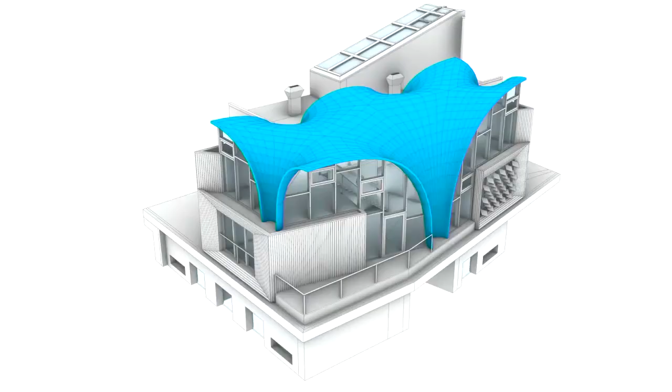This is on site because of all kinds of practical reasons. We save only 50%, so not quite 70 yet. That has something to do with fire. It's a long story. It's a non-issue. But the local engineer of record got a little bit nervous, and so we added a few centimeters to make everyone happy. And we recently successfully tested a full-scale fabrication and structural prototype.

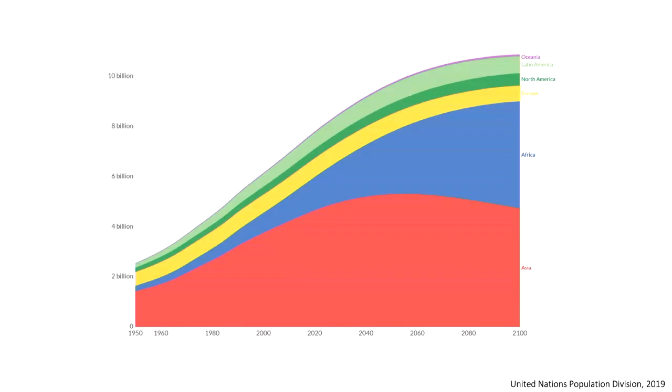I want to come back to reiterate about this urgency. Another way to translate this one New York City every month for the next 40 years is to say that we need to double our building stock. We need to double the amount of floors in this world, and this is another reality, that we might be trying to be a good example, but it's not in our context that most of this expansion will happen. It will happen in Africa, it will happen in Asia indeed, and that is why I'm so proud that we are now working with the government of South Africa to provide solutions for one of their problems.

And the government has developed this fully certified material that actually chips and cuts all of this bio-waste, a concrete-like material with 70% biomass, where all the aggregate and sand is replaced by this biomass. It's in South Africa fully certified, fireproof, termite-proof, and even gunshot-proof, something that is important for safe housing solutions in Cape Town, for example. So we now have a commission; we will build in September a first prototype where we show that we again can reduce this, because what do we offer?

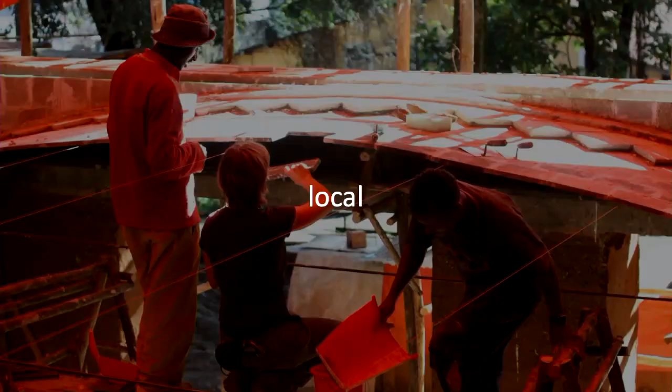So I'm looking forward now, after 10 years of intense research, to use all our computational and digital fabrication expertise to provide systems that are dummy-proof and that can activate local labor and give new construction opportunities in South Africa. So what I talked about is that structural geometry allows us to use less material. Funicular form, which means vaulted geometries, allows us to use better material. And through smart implementation of digital fabrication, we are providing solutions to realize these beautiful forms with no waste or very minimized waste.

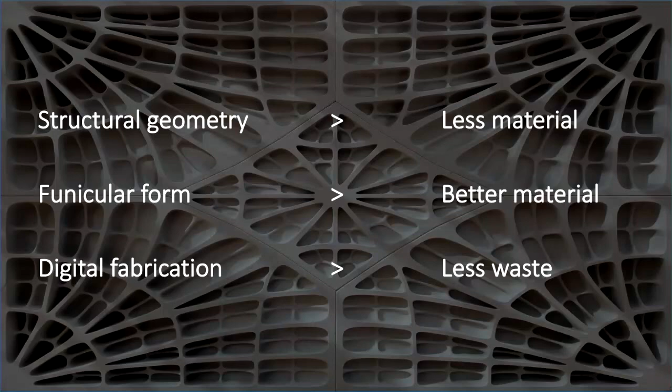Because of all this urgency, and I already said this, we really believe that we all need to work together. That is why we have developed for the last 5 years this open source framework, because we want other people to be able to do what we do. We need to start learning from each other and building upon each other.

And last, I want to finish with an overview of my team. This was my team in March 2019. That is a year old. But I wanted to put these people on the slide because most of the projects that I've shown were done by them. And that is something that I need to acknowledge, that I'm thankful to have an absolutely spectacular, passionate team that helps me hopefully change the world a little bit to provide these desperately necessary, disruptive solutions to hopefully do much better as an industry.

I'm sorry that I went a little bit over time. That is maybe because of the peculiar context.